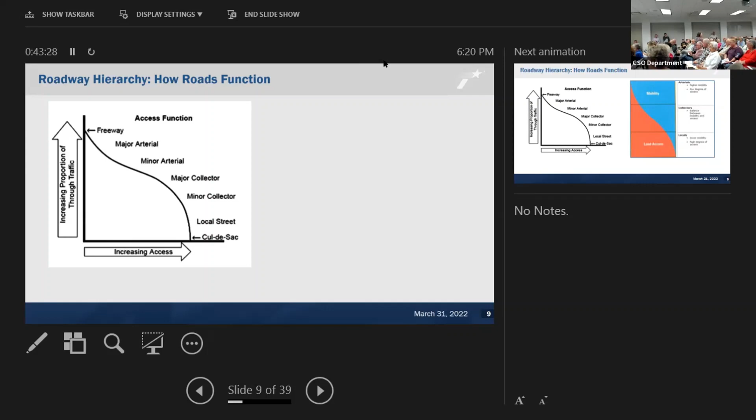It's your Main Street, so I thought that's why Medical Complex Drive. I talked earlier about the long range, the short, medium, and long. Those are long-term investments. But we have short-term needs here, and we have some immediate needs that aren't going to change in this corridor. So let me keep going here.

Another way to look at it is land access increases, your speeds on your road need to decrease. The lanes can get a little more narrow. Those narrow lanes also serve to slow vehicles down. One of the other treatments we like to do to slow people down is to landscape them, because then it's now a signature, it's a parkway, it's something prettier, and it's not just a runway of concrete for people to speed through. And so those are some of the treatments we use as traffic calming measures.

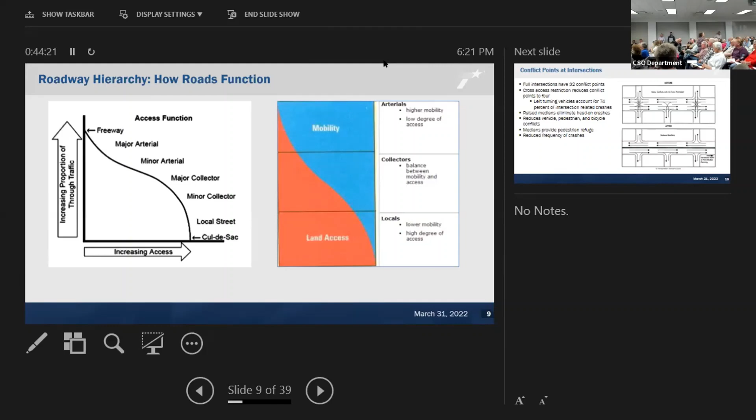And again, the medians, we can landscape them and do other things to make it an area where people want to slow down and be a little more calm when driving. Next slide. So again, talking about medians, raised medians. I know they're very unpopular. When we did them on 1960, they were unpopular. Everywhere we've done it, they are unpopular. Change is hard. It really is.

But if you look at this graphic right here, you can see that a full intersection has 32 conflict points. Everywhere those lines are crossing, that's a conflict point, and that's a potential crash. When you do a raised median and restrict that cross access, you basically have 4 conflict points. So again, we need to provide mobility, we need to provide ways for people to get where they need to go, but we also want to provide it in the safest way possible.

Medians, can you go back real quick?

Medians also provide pedestrian refuge, so if somebody wanted to cross mid-block instead of walking all the way down to the signal and back up to the store they wanted. If I'm on one side and want to go to that store, if they chose to cut across the roadway, a raised median in the middle would provide pedestrian refuge where they could stand and wait. So they're not having to make a decision about traffic moving both directions. They can worry about traffic on one side, cut across, wait, and then when they can safely do so, cut across the other lanes.

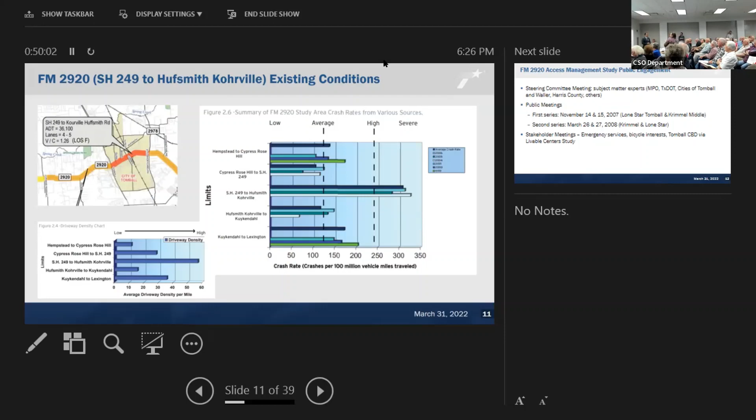So what did we do back then in terms of public involvement? We had a steering committee made up of subject matter experts from your local MPO, from TxDOT, from the cities of Tomball and Waller, as well as the county.

The purpose of the steering committee is to help the consultant and guide the public around a series of public meetings because of the long corridor. We basically presented the same information in 2 locations in the corridor to give everybody a fair travel time to get to a public meeting.

And then we had stakeholder meetings where in these types of improvements, we always meet with EMS, and let me just say, first responders, including EMS, fire, and police. We always meet with them separately, and we meet with them after we've developed the proposed improvements, but before we take it to the second public meeting.

So before we show the public the proposed improvements, we meet with those first responders because we want feedback from them first, so we can make any changes in the improvements before we show it to the public, and we know that we've incorporated that.

We usually also look for other bicycle interests like that. We look for other stakeholders in the community to meet with. And then the access management recommendations.

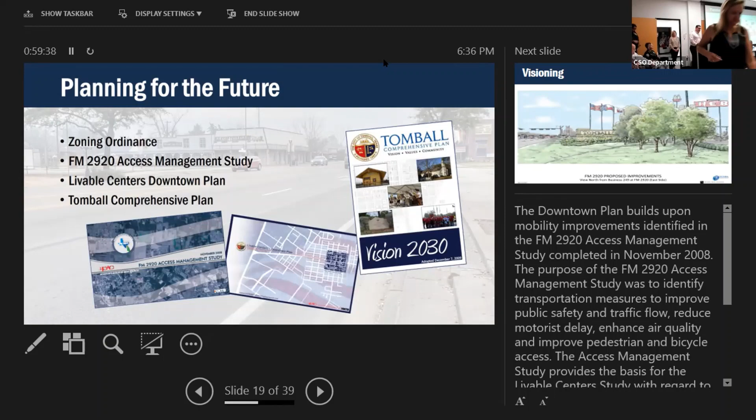So we put forward some of these visioning documents to give you guys an idea of what this might look like. Here is an illustration of what the Tomball, or Four Corners, might look like with the closure of that right turn lane going east onto 2920.

Here is another shot from an area looking down towards Pine, showing some of the improvements and amenities we're looking to implement along the roadway. I think this one is near the school.

It gives you an idea of what that would look like with sidewalks on both sides. And if you notice the mast arms for the street lights, there's no longer the wire hanging.

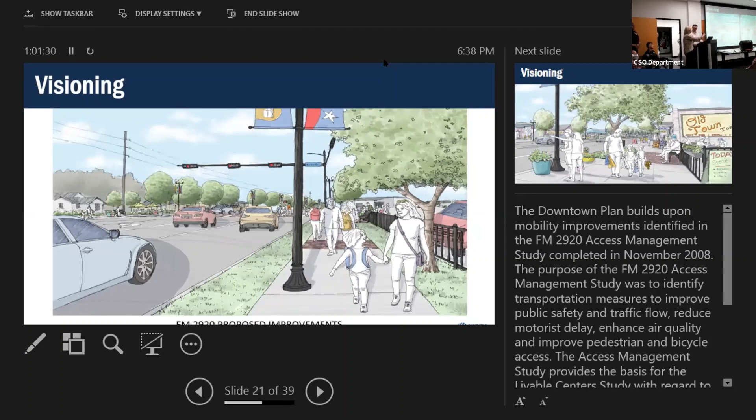So this is another shot from Pine Street looking east. If you're at the Pine Street intersection looking east, this gives you an idea of what you'd see with the widened sidewalks, along with some furnishings and the new types of light standards we'd implement along this part of the road.

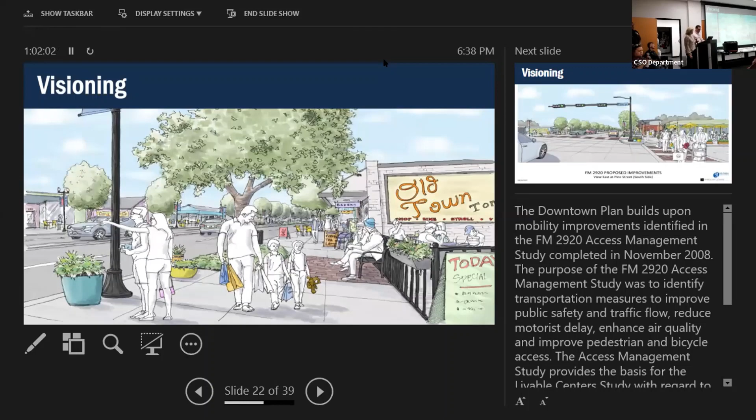With those trees, Steve, that's the hardest condition. I understand, and we're going to get to that in a little bit, and then we can have those conversations right at the end. I promise we'll get there. Yeah, no problem.

Sorry about that. So here's another location viewing east on Pine, again just a different vantage point looking across the intersection itself, focusing on that mast arm, removal of those wires hanging across the intersection, and some of the improvements to increase the aesthetic appeal of the downtown area.

Now I'm going to pass it along to Kelly to finish off. I want to talk a little bit back to livable centers, because the livable centers really is what pushed us forward in this process.

The goals of the livable center study were to activate the pedestrian realm, to provide amenities along your sidewalks, areas where you can experience what downtown is, to provide public parking, and also to enhance the depot area. So I want to talk about some of the implementation projects the city has undertaken.

You all know the on-street parking had been removed when TxDOT did the resurfacing of 2920, and we were able to channel people back to the public parking lots. The removal of those on-street spaces took away 76 spaces, but we were able to add 263 public parking spaces. At the time of the study in 2009, we had 372 spaces downtown; we currently have 559. Is that enough? Absolutely not. We want to have that problem, right? We want people to come in, but we've got to continue to work through the parking and look at options for parking and connectivity.

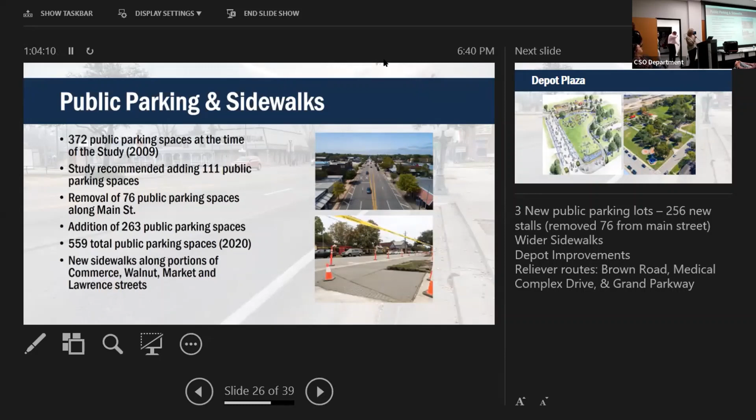Also, new sidewalks were constructed along portions of Commerce, Walnut, Market, and Lawrence. And then the Depot Plaza improvements.

So the image on the left is the illustration from the Livable Center study. It was really the master plan that drove the improvements in the depot. Things like the public restrooms weren't in place when we did this study; those came out of this. People want people to come downtown, you want them to spend money in your shops, they kind of need to use the restroom at one point.

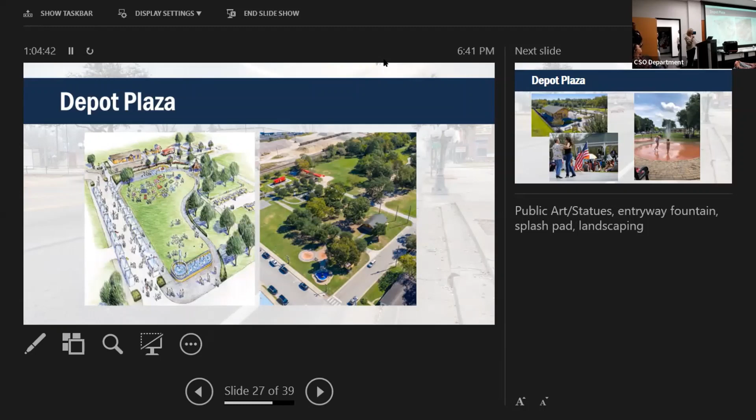So that was something that came out of that, part of that implementation. The splash pad, our fountain, the improvements around the actual depot, all of that has been an implementation of what was identified in the Livable Center study.

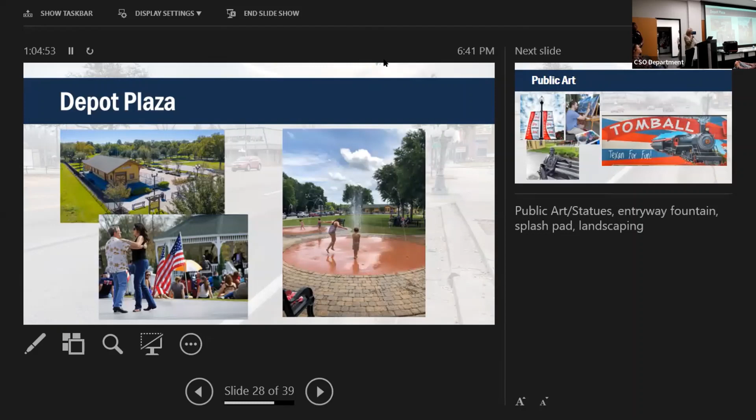Also public art. One of the things we heard from the community when we did the Livable Center study initially, and did a lot of the visioning workshops, was that all these other towns have murals and public art and banners and charm, and we don't have any of that. So we started looking at ways to increase that. A lot of the statues and art murals that have come out have really been set from the Livable Center study.

What we're working on next, and this will obviously be very important to those of you with shops on Main Street, is improvements to the alleyways. The city has earmarked money and designed these for the alleyways. We'll be looking at making those improvements, hopefully within the next year. We've got three alleys being programmed: the north and south 100 blocks, and the 200 block on the north side.

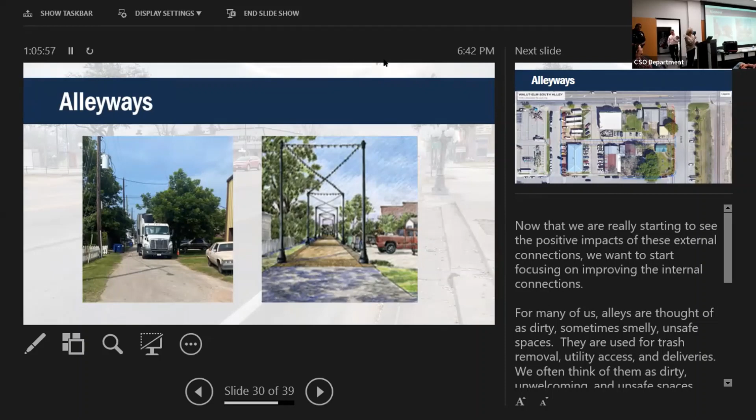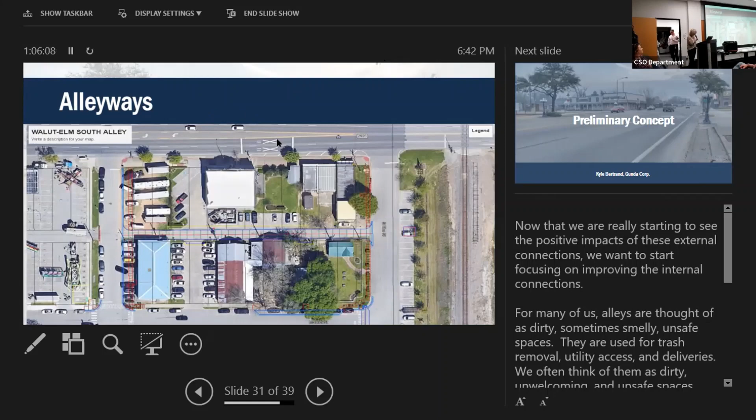This gives you an overview of what that improvement could look like. You can see the alley in the center.

I do want to mention the Economic Development Organization: what we do is try to help your businesses grow and succeed, and part of that is helping implement these studies and programs. We take what the city has set in their policies and put that into our strategic plan. Part of our strategic plan is to help implement things that create character and opportunities. What we offer, for those of you here who may not be aware, is facade improvement grants.

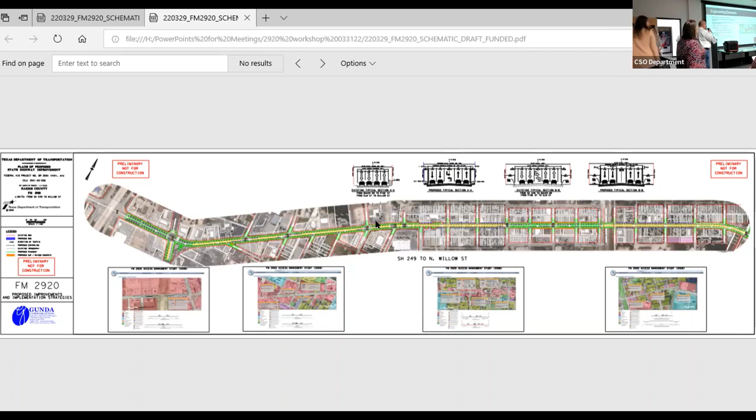Yes, to stop sharing the first one. Patient with my stage hand, he's new. Hold on, I'm the new guy. You're a great new guy.

So in general, folks, the reconstruction will involve reconstructing the corridor with concrete pavement. Again, we'll have 5-foot sidewalks as a minimum, and in the Old Town area they will be 16 feet. We will remove the northbound right turn at 249 and FM 2920—the northbound right turn movement. We will improve the side street radiuses to aid in visibility for turning movements and vehicle size. We will complete the center turn lanes between School and Pine, as well as Sycamore down to Willow.

Raised medians with pavers and possibly landscaping will be introduced from Pine to Elm Street, and there'll be a short piece of median introduced on the east side of 249 Business and 2920. Other improvements will include pedestrian lighting, and we'll do some mast arm signals—the ladies previous to me covered some of that. There will be drainage improvements included in this, and we will integrate improvements or relocations for city utilities currently along this corridor per the city's planning documents, which could need replacement in kind or upsizing.

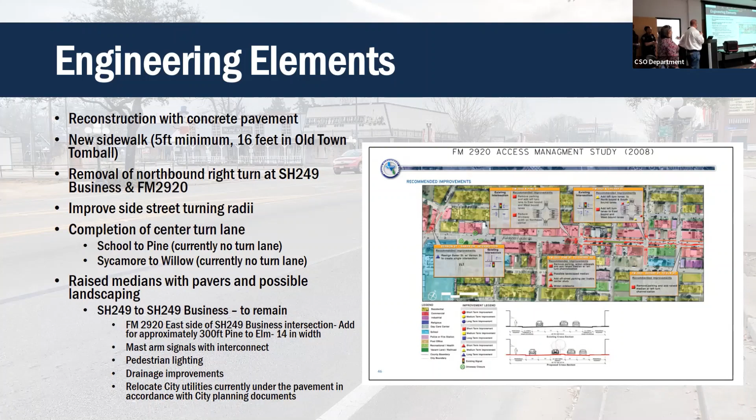The documents you got, let's go to these—this is where I'm talking about. We'll take this right turn lane out and reconfigure that full area for four corners.

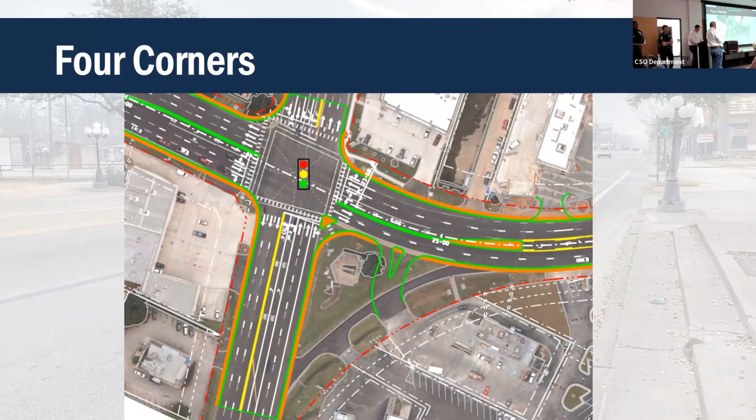What we're showing here is Pine Street, and we're starting to introduce the raised medians.

Can you slide that down? Next slide. They are having problems hearing you now. Yeah, they can't, you're gonna have to face them.

Really close, really loud. Okay, so here, all we're trying to illustrate is to show you what the raised median will potentially look like between Pine and Elm. You're gonna cut off cross traffic at Oak. The intent is to push people down to a signalized intersection for a safe turning movement, and that's at both intersections.

So if you see the wide median in the center, there's a dedicated left turn lane that'll have a raised median coming back, and you'll be able to store vehicles in that area that want to turn left. Then the cross access for North Oak is cut off via the raised median through there. The raised median offers a couple of opportunities though for landscaping, again making that corridor look more signature, and it's a pedestrian refuge. If somebody wants to cross the street, they could more safely do it with the median there.

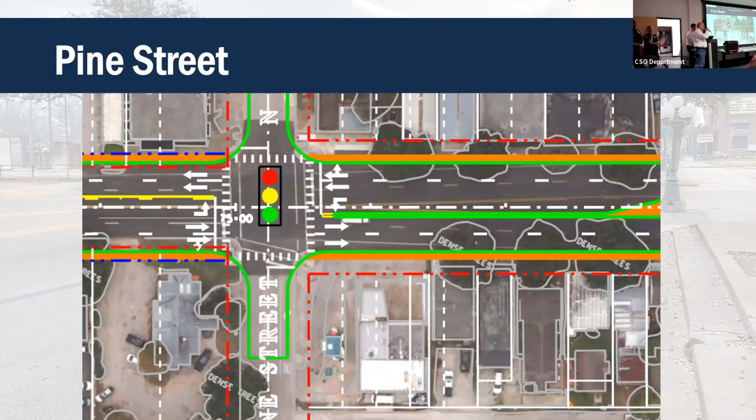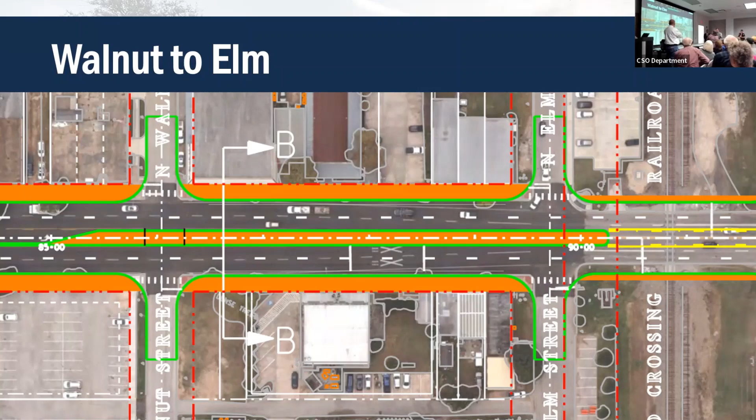No, but that's a valid concern that we need to address. As part of the design process, the operational components of this traffic will all be remodeled.

You got no left turn lane at Elm Street. Would it be possible to have new data before moving forward?

The 2017, 2021 crash analysis still shows this corridor above the state average. Okay, there has been improvement. What is the state average?

I mean, let's just put that number out there so we can react to it. What is it? Y'all talk about this all the time. Do we actually have those numbers? That's the question.

So get those numbers, he's going to get the numbers. We did look at the additional crash data before 99 opened up and then afterwards, but we did not consider 2020 and 2021, because those are outlier years. It would not be appropriate to include in your crash data.

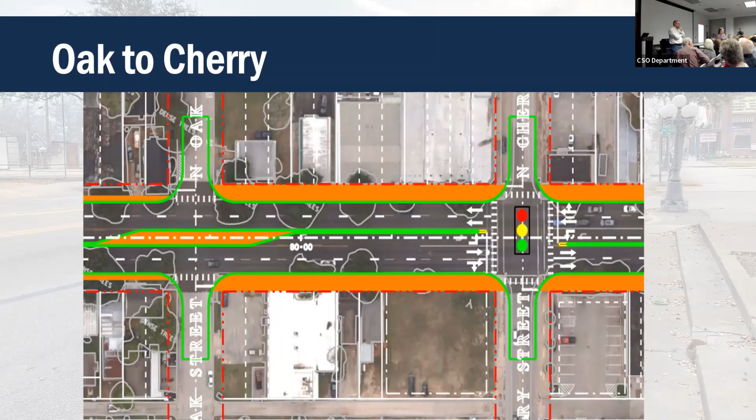What about the trees? During construction, when you pull up the existing concrete that's there and put back concrete, those trees are going to be disturbed. There is a plan though to put back trees that are quality and signature.

Okay, I understand around here at 249 and 149 there are accidents a lot because people are coming off the freeway. Now there's 2978, everything's going like crazy. But the blocks you're talking about, people stop, I stop myself and let people walk around the street.

They walk right there, they don't want to do that, and so I don't agree with you saying you're doing it because of safety. But you were saying that you stop and let people cross? Everybody.

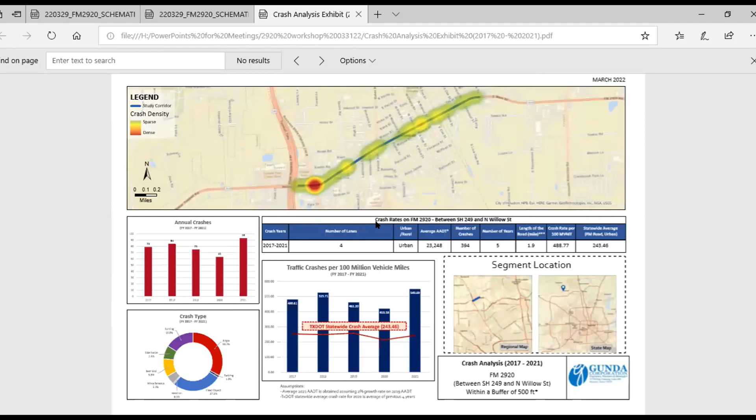Okay, well, eminent domain is a whole other discussion. But for me, if you expand the road, put another lane in and the sidewalk, based on the numbers I see, you're inside my building. So you're going to be taking an income producing part of my building away from me. How are you guys going to address that?

So I can actually speak on that and Kyle can elaborate. So there's 2 phases, there's ways you can do it, and part of the plan didn't include anything from the building, because that's proposed to this right there. The one that we're proposing does not damage the building. So when you see some of these schematics, they'll have that movement, and then there's one that actually this is based on, it's not. And so when we talk about eminent domain, what she's saying is that we need to acquire some corner clips or turns at the intersection. But as far as buildings, there's no damaging of buildings. Okay, well then, that's what corner clips are.

So it's just less than an acre for the whole thing.

In order to correct, okay, and just to step one more, since I trust you in the office and so forth, I would like to speak to the city engineer so I can talk to you about the plan, because that's the horse's mouth on whether we can do this or that through the distances.